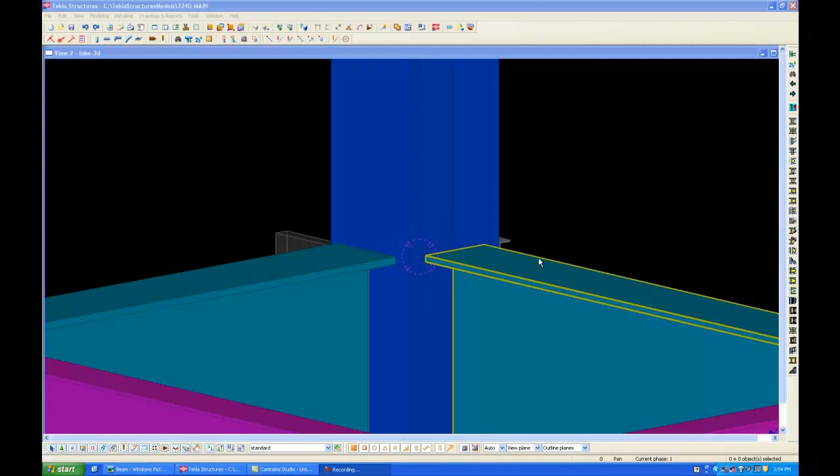So today we'll be talking about the coordinate system used by a connection builder. Let's say we want to make a connection between two beams.

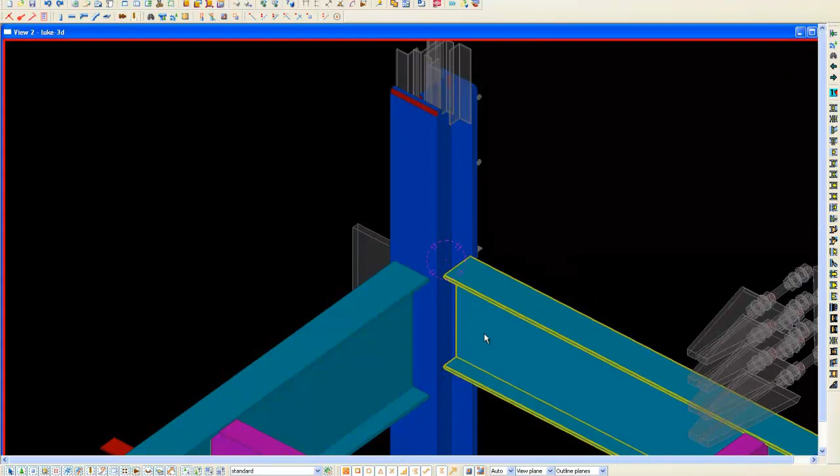We have our beam number 1 and beam number 2, and we want to create a connection. Say we want to create a shear plate connection with bolts on it. Now we need to figure out some sort of coordinate system so that we know which position to place the bolts.

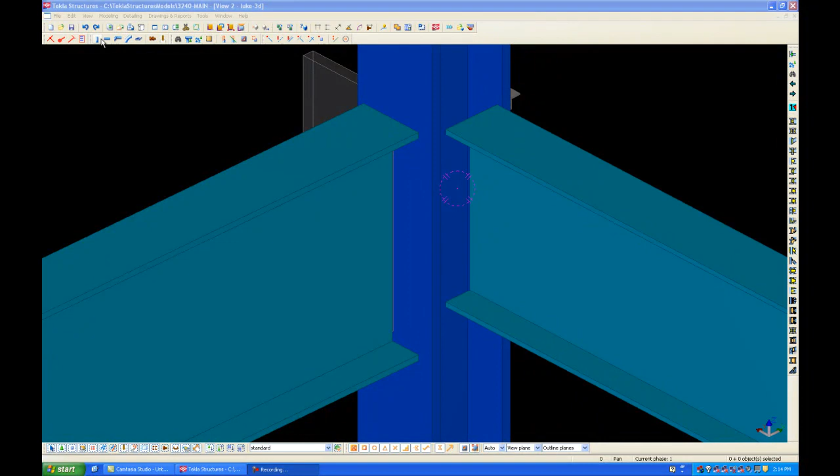Now in Connection Builder, there's a help file that describes how the coordinate systems work. If you click on the Connection Builder icon and then click the help button, it'll load up a help file. All I have to do is go to the search tab and enter coordinate, search for it, and click on Connection Coordinate System and Planes.

Here it shows you how the coordinate system works. Basically, each beam has its own separate coordinate. So each beam has a x vector, a y vector, and a z vector. The x-axis is along the length of the beam. The y-axis is along the width of the beam. And the z-axis is along the height of the beam.

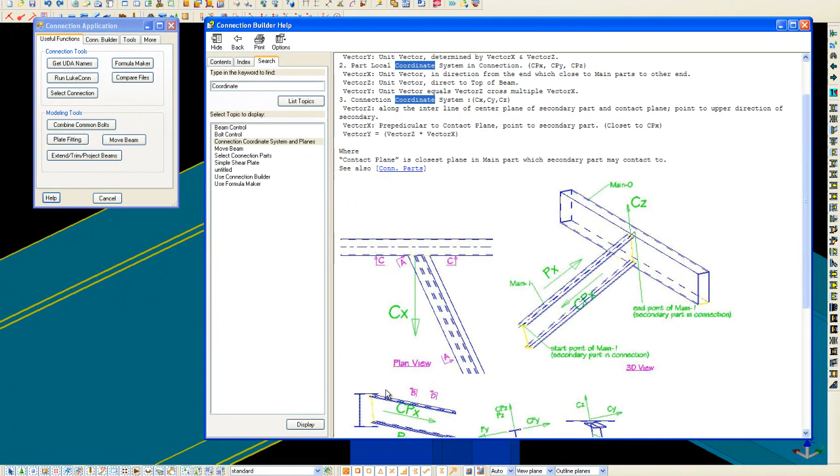So, how does this come into play in Connection Builder? And how does this come into play when we're making macros and connections? Well, let's put this in practice.

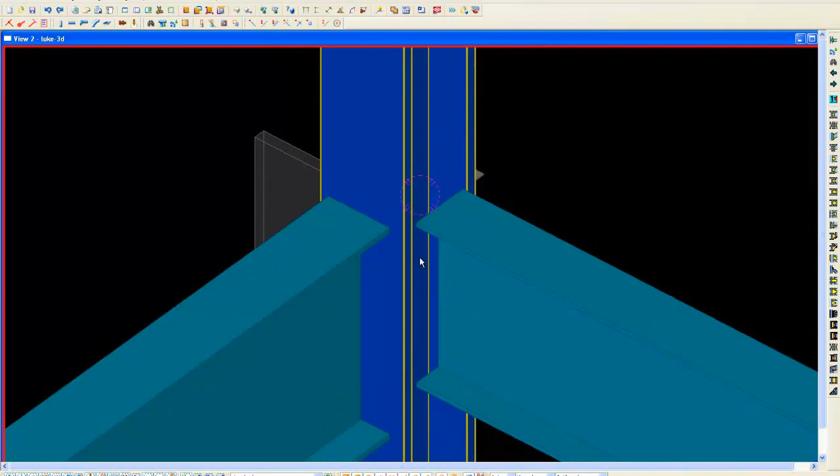Say we want to create a connection between these two beams, right? Well, first click on Connection Builder, then go to the Connection Builder tab and click Build Connection. And let's call this connection Demo May 26. Okay? And we'll add a bolt first.

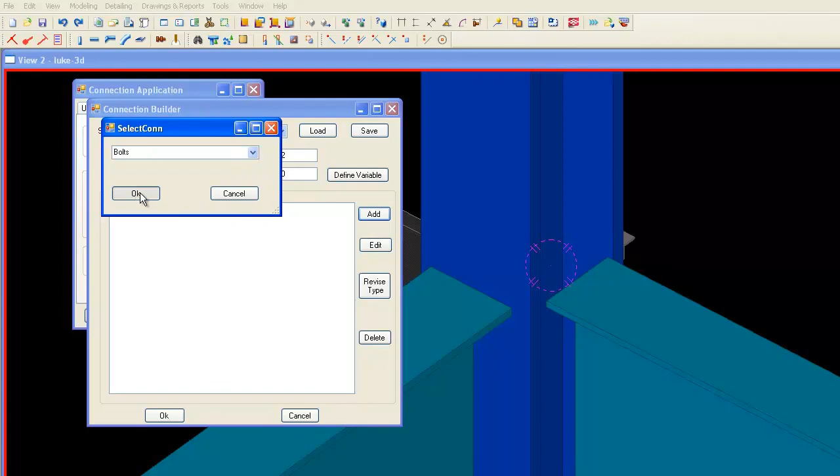Bolts. So these macros are existent within the Tekla Structures macro. Now for connection parts, we want to connect these two beams, part 1 and part 2. So part 1 is main 0, part 2 being main 1. Bolted parts, we want to bolt a shear plate, which we'll create later, and part 2. So we'll fill in this part later.

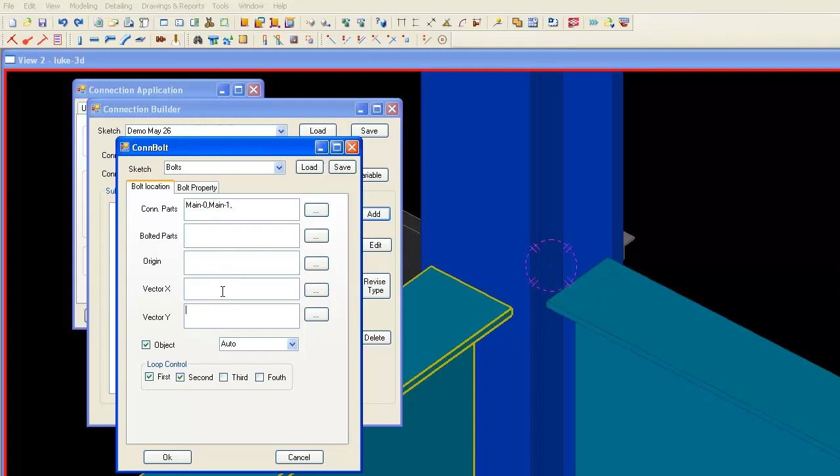Now for origin, we want to determine the origin as a point of reference, and we want to determine a vector x and a vector y. For example, if we set an origin at this particular point, then we set our vector x along this direction and our vector y along this direction.

Then we can say that our first bolt on the top left corner can be a certain number of x spaces from the origin and a certain number of y spaces from the origin, so that we can set a coordinate for the bolt, and then we can set how far apart the bolts are.

So for origin, let's set the origin to somewhere here. Now we click it open and we can choose planes. So we can pick the origin to be the intersection between several planes. Now what do these planes mean?

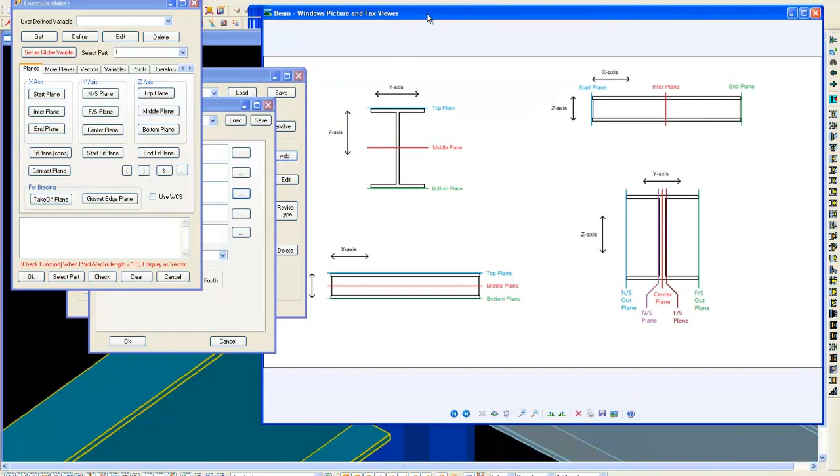Well, we know the x-axis goes this way, so the start, inter, and end planes are planes that intersect the x-axis. I've drawn the plane representations using a quick paint program. So here we have the x-axis along the length of the beam, and along the height of the beam we have the z-axis.

The start plane will be the first plane, the inter plane will be the plane in the middle, and then the end plane will be at the end. Similarly, these planes intersect, or are perpendicular to, the x-axis.

Similarly, for the y-axis, which goes this way, we have the near side plane on the inside, the center plane in the middle, and the far side plane on the other side. We also have the near side out plane on the very outside, and the far side out plane on the outside. And for the z-axis, perpendicular to it, we have the top plane, the middle plane, and the bottom plane.

So going back to Tekla structure, say we want an origin here. We need 3 planes to intersect to set the origin. So let's make the first plane the top plane, intersecting the z-axis.

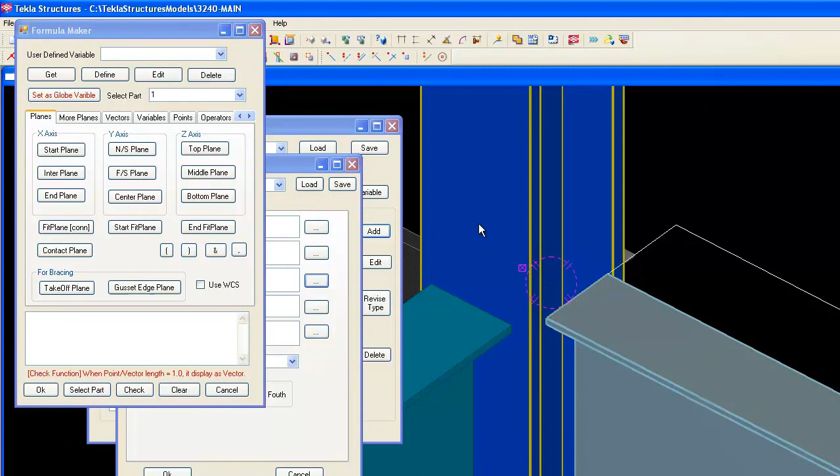So first we want to select part 2 because we're dealing with the second beam. And then we want to select top plane. So we get PC2 top plane. Now we can check this to make sure we've selected the right plane by clicking on check.

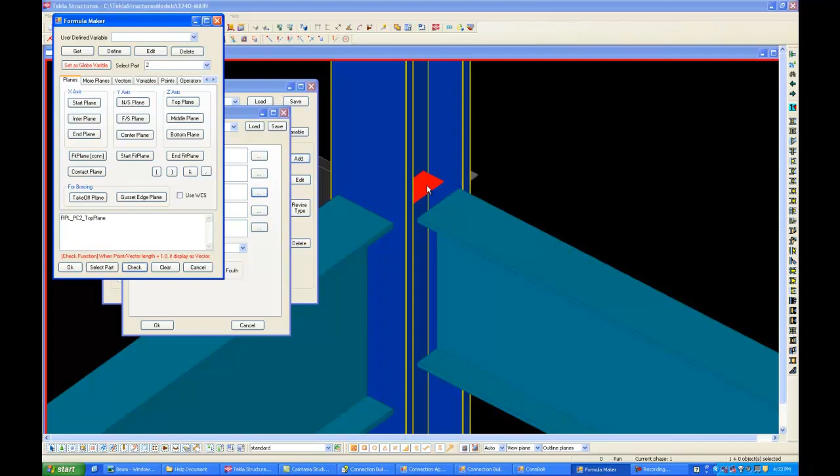So we already selected the first one, the second plane, and now this is the direction of the top plane. So we can clear it, interrupt, redraw, get rid of that little red thing. Alright, so we want the intersection between the top plane of the first part 2.

Click AND between that intersection, that plane, and what else do we want? We want the intersection of the plane to this side. So we could write the intersection of part 1, the far side plane, which is, let us see.

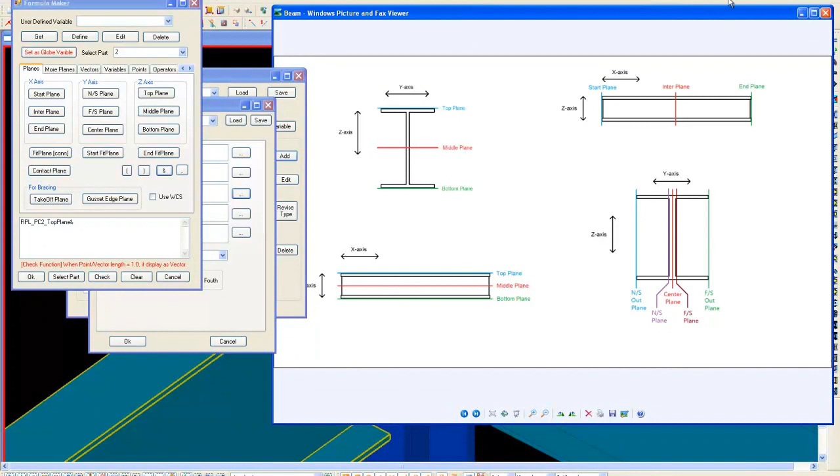So we can either choose the start plane of part 2, or we can choose the far side plane of part 1. Let's choose the start plane of part 2. So still with part 2, start plane. And the third part, the third one, so we have the plane over here, the plane over here.

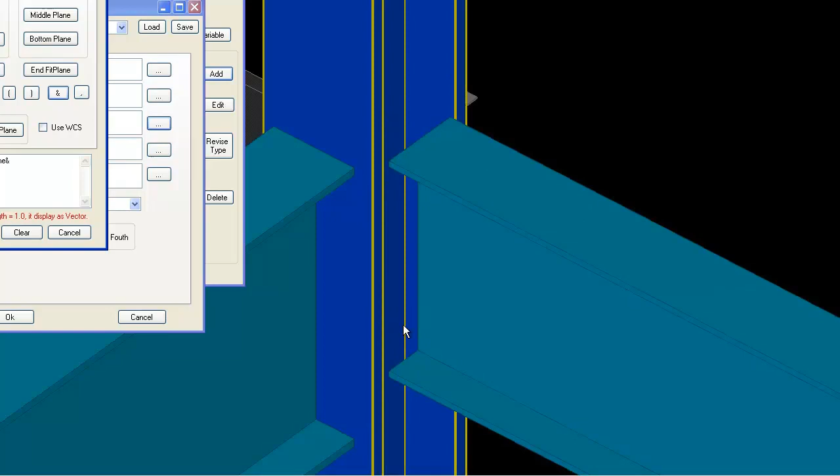And let's pick one last plane. So we have this plane, we have this plane. So we form the line over here, that's the intersection, the line. And let's pick a middle one. So we'll pick the center plane of part 2.

Or, going back to our drawing, we want the middle one. So the center plane of part 2. So going back here, we pick the center plane.

Now, once again, we can check it. If it doesn't show up, select the 2 planes and then click middle mouse button, and the check should show up. And here we have the origin. Good. That's exactly where we want it. Click OK, and we set the origin.

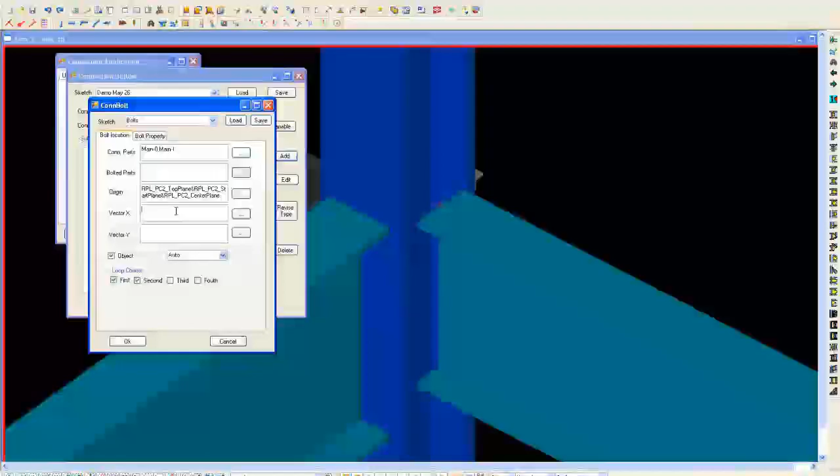Now for the vector x and vector y. Let's say we want vector x to be this way. So we go to vectors and just use these ones. So part x, part y, part z. We'll just use part x of the beam, of the second beam.

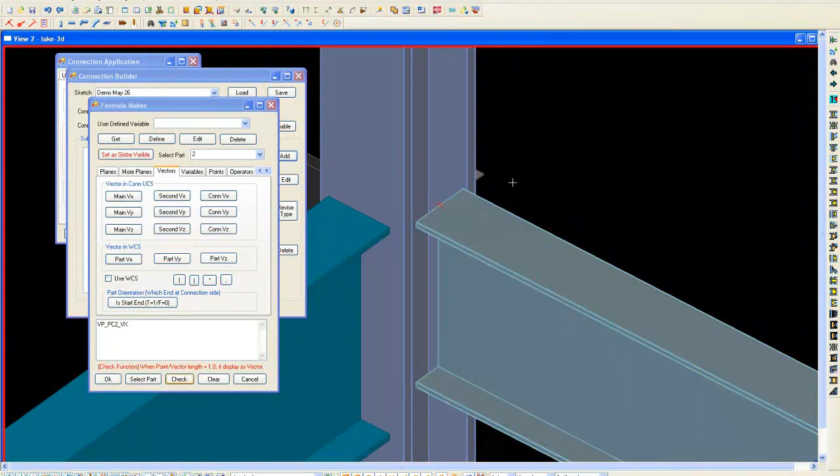So part x, once again, check it. Click on the first beam, click on the second beam, middle mouse button. Yeah, it's going in the right direction. Good. So that's our vector x.

Click OK. Vector y, let's see. Once again, go to vectors. Now we want the vector y to be going down this way, which is actually the z-x axis. So it's actually the z-axis. First we want to pick number 2, then we pick part z.

But for this one, the z-axis, the z-vector, the vector z is actually going upwards. We want to go downwards. So we just flip it by putting a negative sign in front of it. And then we check it. So click on the first beam, second beam, middle mouse button.

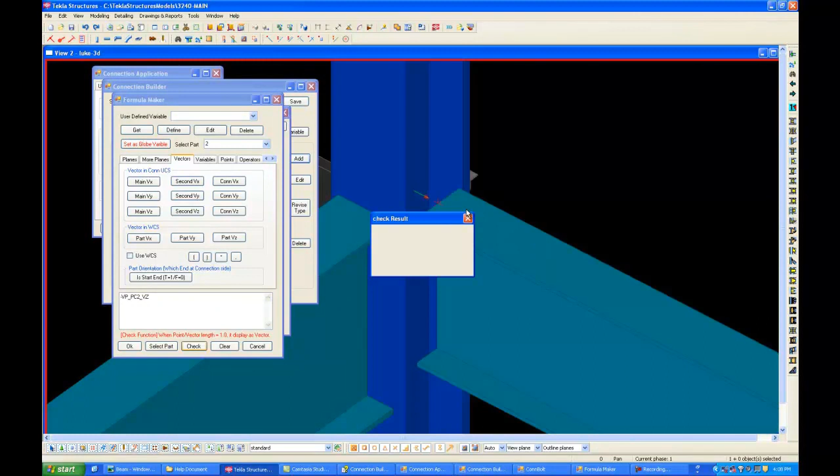And we can't really see it at the moment. We're going to have to hide this beam to see where the vector is. Going down. So that's good. Interrupt it. We got what we wanted. Redraw the view, and redrawing will cause the points to disappear, but we know where it is.

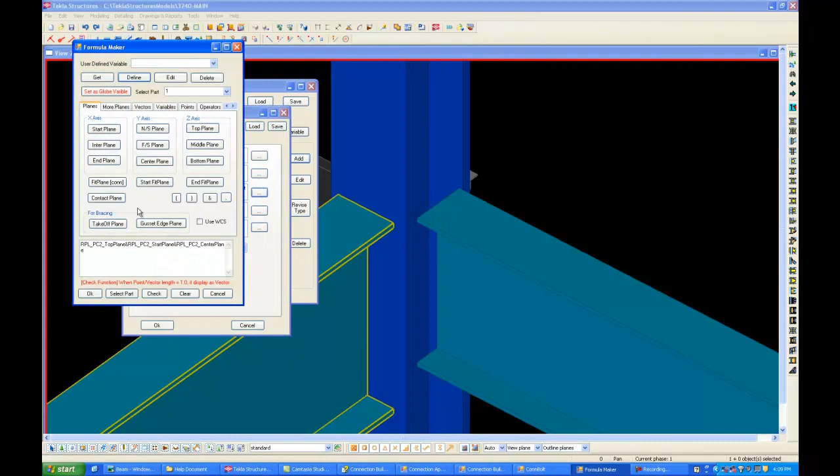So if you ever want to double check where the origin is, just click check again, and there you have it. So now we set our origin, x and y. Click OK.

We'll set the parts for the bolts later. Now let's add a second one. Let's add shear plate. There we go, shear plate. Connection parts, once again, part 1, part 2.

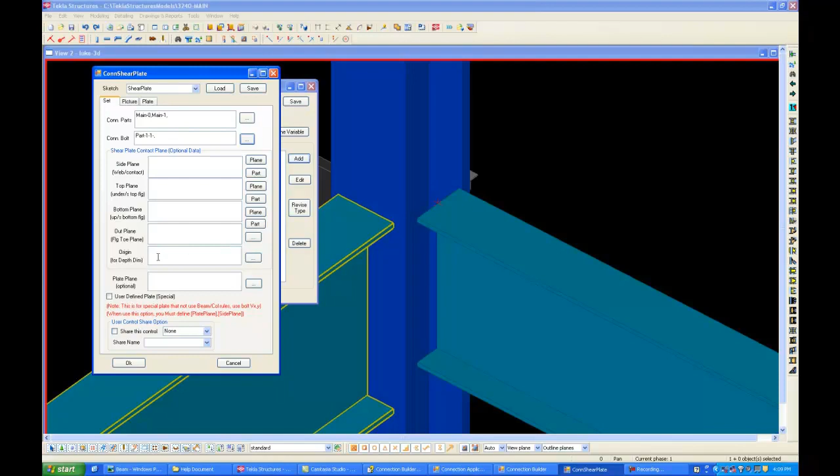Connection bolt, that's the bolt connection, bolt used in the connection. These ones are optional, you don't have to enter anything for now. And that's it for the shear plate.

Okay, now let's add a beam end setting so we can cut the second beam according to the proper size. For the connection parts, we have connection part 1, part 2. For the bolt, we have this as a bolt, as our bolt. And for the shear plate, we have part 2-1 as our shear plate.

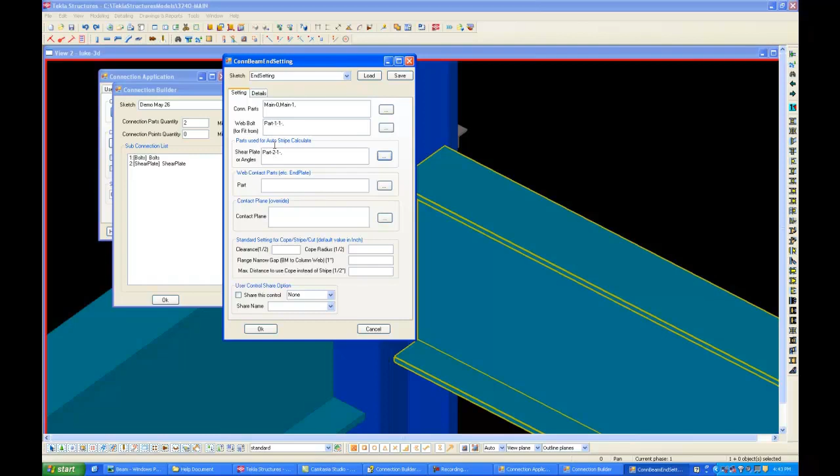So basically, main 0, main 1 is the main beam and secondary beam. Part 1-1, the 1 corresponds to this one is the bolt, and part 2-1, the 2 corresponds to this 2 is our shear plate. Click OK.

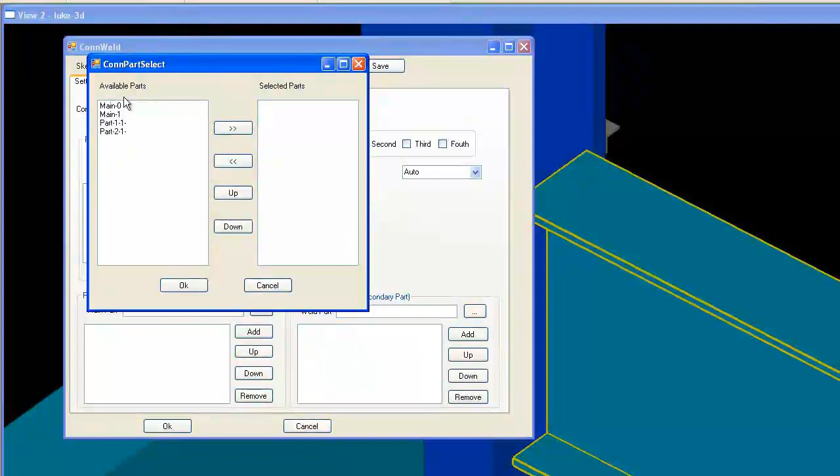Now let's add a weld. Go to weld control to weld our shear plate. Okay, so first select the connection parts, so the 2 beams, the main beam and the secondary beam. Now, part weld to main part, part welded to. So what's the beam that we're welding to? That's the main beam. So main 1, main 0.

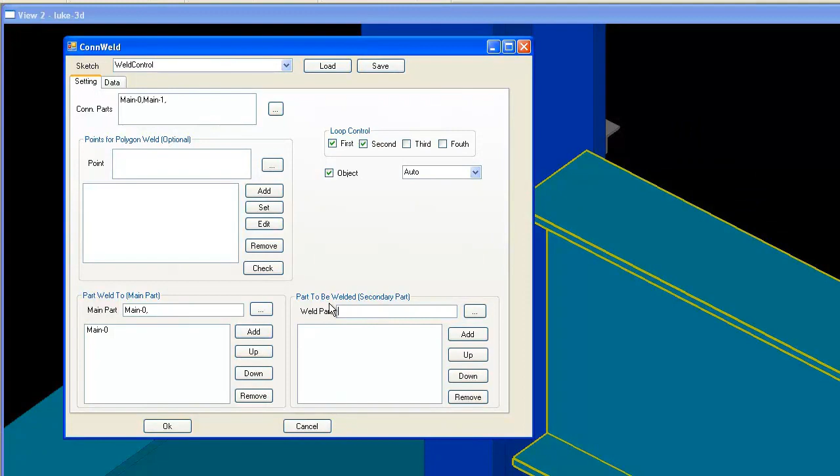Add part to be welded, the secondary part, which is our shear plate.

Click OK, and that is it for our connection builder stage. Click OK, it will save. Go to user dialog setting. Load up the connection macro we just made.

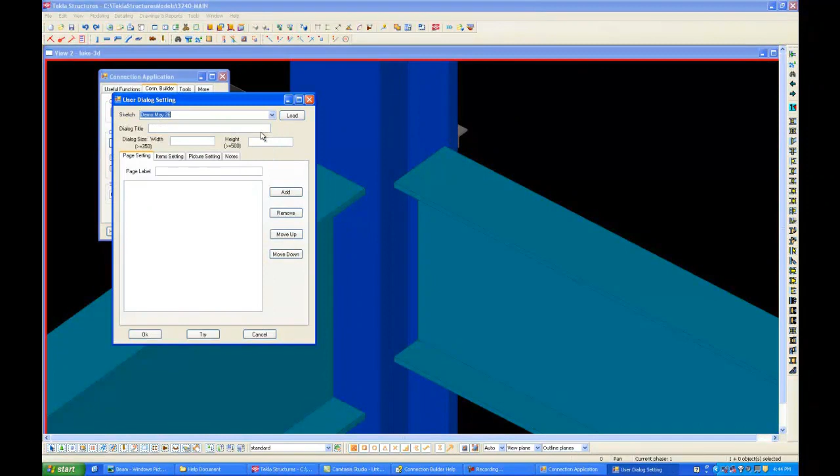Now let's first get some pages. So we have bolts, beam and setting, shear plate, and weld control and weld symbol. First one we have bolt, so this will be our first page or first tab.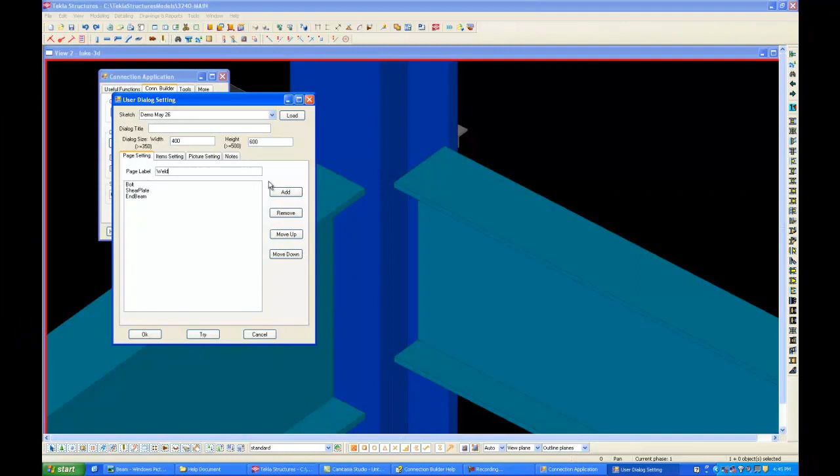Okay, cool, now let's edit this. So we'll put this on page number 1, edit. Now the pages go from 0 onwards, so page number 1 is actually the number 0, page number 2 is the number 1. Remember this. So this one will be on page 0.

We'll change the label just so we know that we've edited it. And the next page is shear plate. We'll pick edit, page 2, shear plate. Set that.

And then next page will be end beam setting. So edit this, end beam, page number 3. We'll put, set it. This one we don't need to worry about. We'll also put it on page 2, but we don't need to worry too much about it. We'll just move this down a little bit, say 40, so that they all fit on the same page.

Now we have weld control. We'll fit this on the last page. Put it on page number 4, which corresponds to number 3, and we'll put this over on Y10. And for this one, we will put it on the same page, but we'll go down a bit. We'll go 95. You will see why.

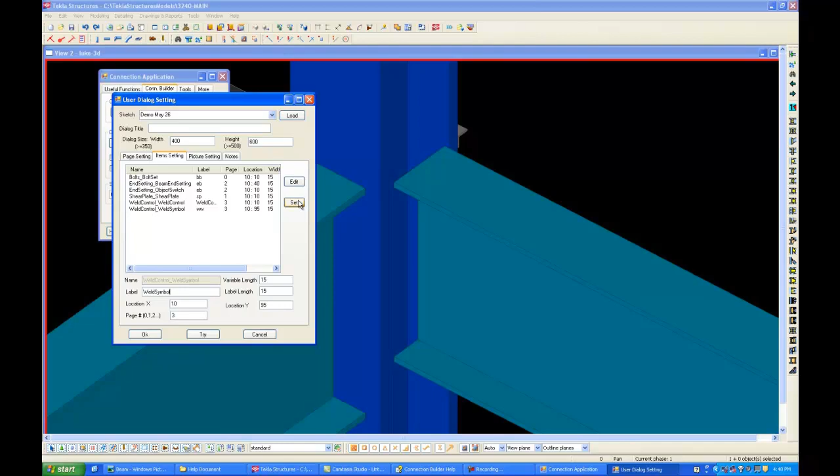Alright, let's try it. So first page is the bolts, second page is shear plate, third page is the beam end. We'll change the name to weld control, weld control, and weld system symbol.

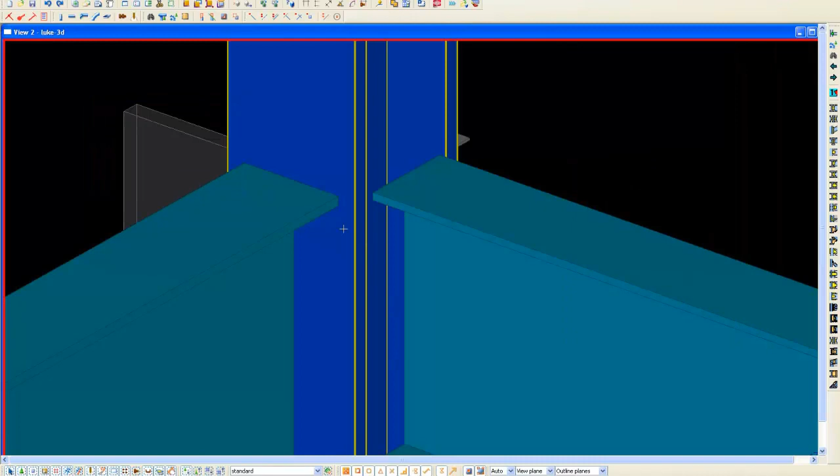Okay, check everything's all good, sounds good, click OK. Now let's put our macro to the test. First, double click on this, select connection, select the connection we just made, click on the first beam, click on the second beam, and voila, we have our connection.

So now we can play around with the coordinates. Let's interrupt, double click on this. Okay, for example, the bolt position. So there's the bolts in the X position, so this is the X, there's 2 bolts in the X direction, and there's 3 bolts in the Y direction.

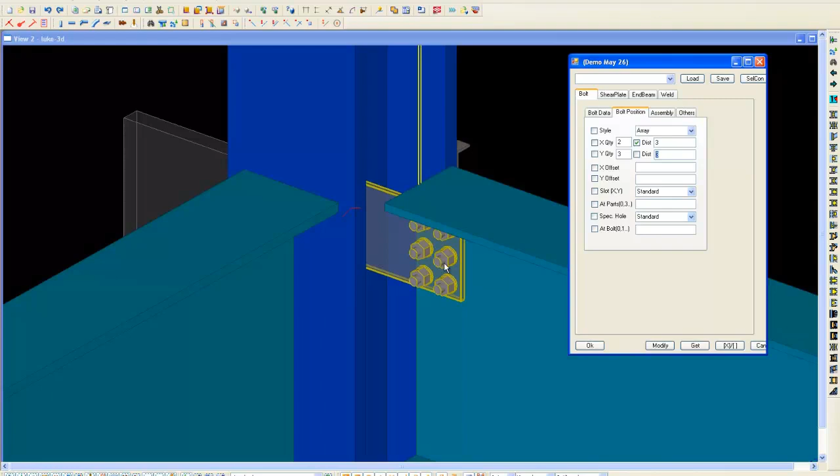The style is array. It's basically array just says name the number of bolts in one direction, name the number of bolts in the other one, and it will create an array of bolts. Now when there's only one number here, it's the distance between the bolts. So this distance 3 is the distance in this direction between the bolts, and distance 3 here is the distance between the bolts. So distance in the Y direction, distance in the X direction.

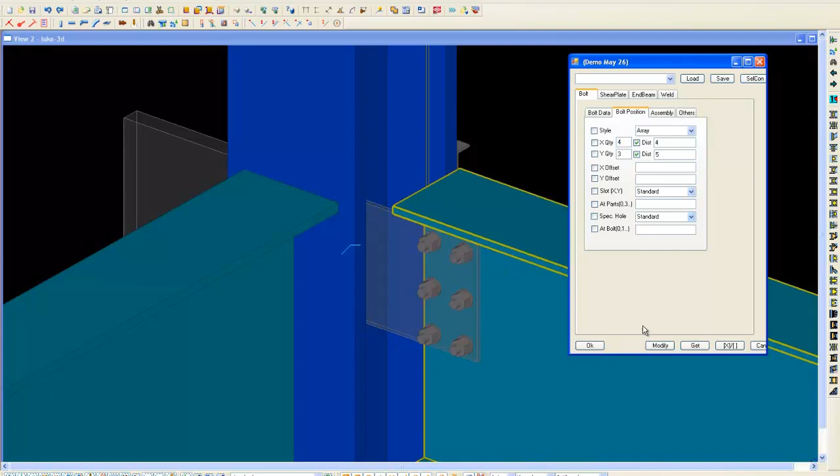Now, if we change this to 4 and 4, or 4 and 5, you'll notice these bolts getting more spread. The Y direction is more spread than the X direction because 5 is greater than 4. These are in inches. Now we can change the quantity, we can change the number of bolts in a row to 4, and this is what we get.

Cool. Now, if we enter 2 numbers in this separated by comma, the first number is how far the first bolt is away from the origin we specified, and these are all with respect to the origin we made earlier. So for example, if I write the first bolt is 3 away from the origin, and then subsequent bolts are 4 away from each other in the X direction, you see it came closer.

We change this number to 2. You see it becomes even closer. Good. Because that's how it works.

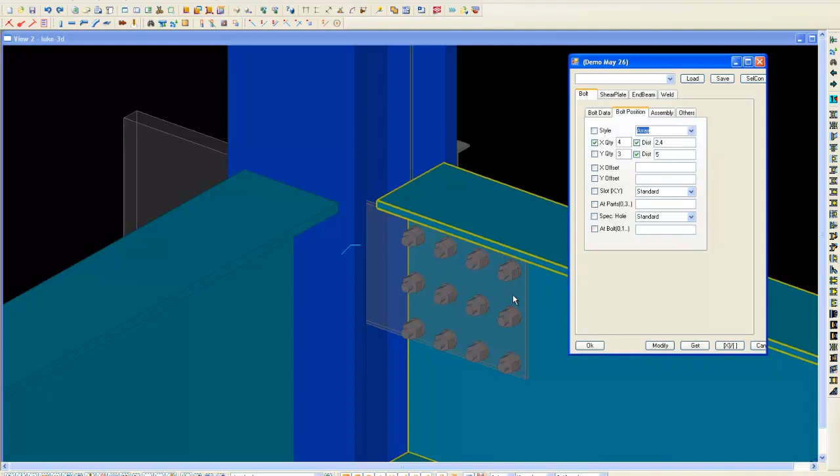Symmetry by axis: when you have, say, an axis right in the middle, if you have symmetry, any bolt you put on this side will be mirrored on the other side along the axis. So if you have symmetry along the x-axis and this is the x-axis, bolts will be mirrored or symmetric along the axis. So these are the different styles. Feel free to test them out. This concludes our video tutorial about the coordinate system used by Connection Builder.